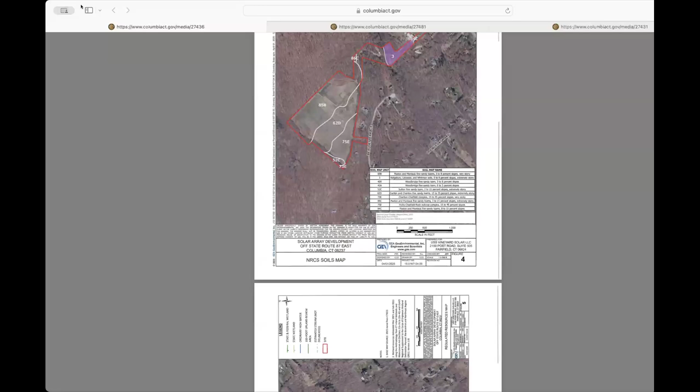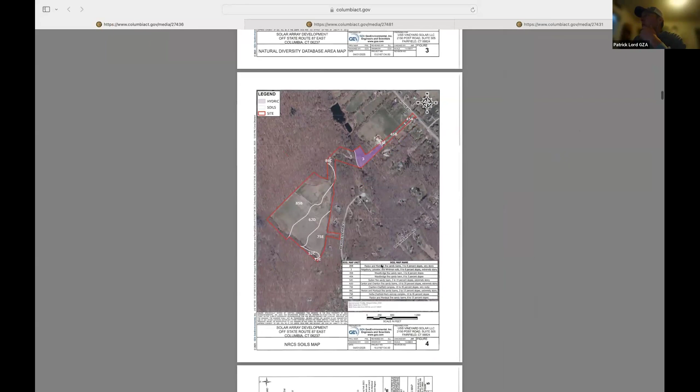Did you want to pull up a site plan, Isabel? Yes, I've got the application here. Excuse me for a moment. I apologize. Let me see. Too many windows open. Let me share my screen here, just to give everyone some context. Okay, so this is the overview of the site. And if there's a specific page, Patrick, that you'd like me to scroll to, let me know. Probably the sheet plan. So it would be sheet C104 of the plans. So that's showing. Would it be easier for me to share my screen? Whichever is easier for you would be completely fine. If you have it in a better format, that would work. Okay. And how do I do that? There should be a button available to you down at the bottom in the middle. It's green. Okay. All right. Let me know if everyone can see that. We can see it. Yep.

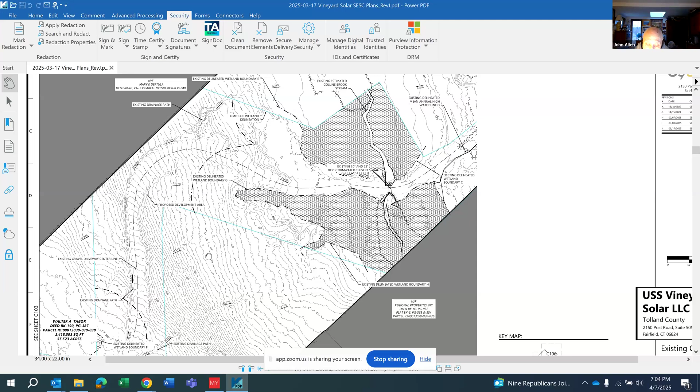Okay. So the proposed work limits are this blue line here. So this is the existing access road leading up to the vineyard. The upland review areas are within this shading. There's obviously a large wetland complex associated with the brook here and on this side of the road. There's no proposed improvements to this larger culvert crossing. They do want to replace this 18-inch CMP that collects water that comes off as sheet flow from the vineyard and the hillside with a 30-inch, just so it can handle larger storms. That's what the engineer came up with.

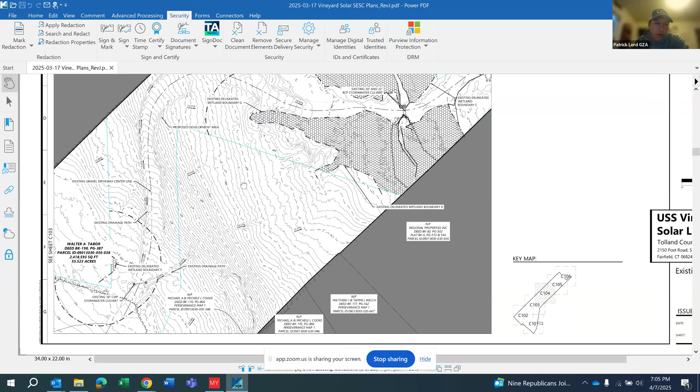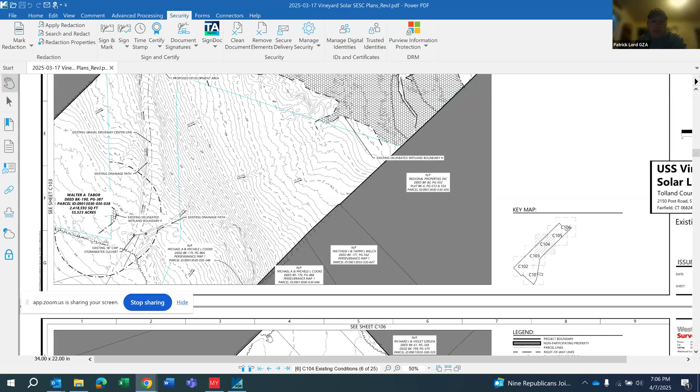So the existing road ends just at the edge of this upland review area here. And what's going to happen is when they build the solar array, they obviously have to get that power to the grid. So to minimize impacts, what they're proposing is to embed an underground wire within the road base itself. So what that's going to do is limit any digging in wetlands or anything else. Before the project, obviously they're going to set up appropriate erosion and sediment controls, which include silt fence and like a biofilter wattle material. I can go to, let's see.

So this will give you an idea. The solar array is going to be here, the upland review area from this wetland in that corner is here. There's another wetland in this corner, so the upland review area is here for that. So the solar array is going to be outside the upland review area itself.

So here you can see this will be new roadway leading up to the solar array with all the electrical components that are needed to transfer the power. So from here to the end of the road, that's where the improvements are going to be. They're also proposing, I can go to a different plan set.

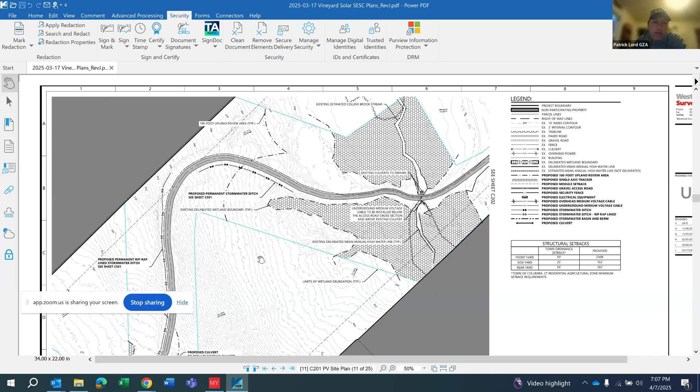There's an existing kind of drainage swale that's on this side of the road, and they're proposing to make some improvements on that with some riprap, and they're proposing a small drainage here. So this portion will catch any water coming on this side of the hillside and direct it towards the wetland area.

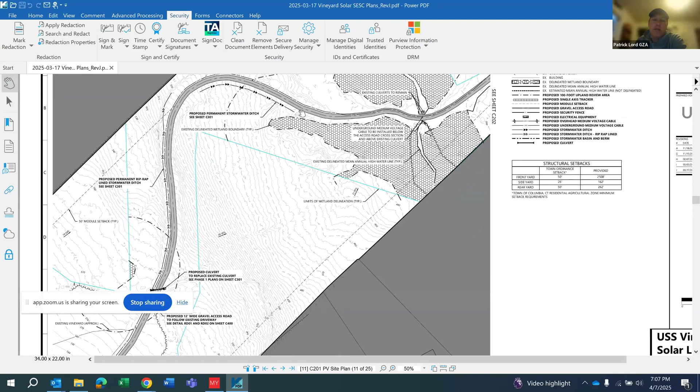Are there any details in the packet about what that drainage ditch is and also the duct bank section through the road? Sure. Yep. That sheet, like in the 400 series. So this gives you an idea, here's the upland review area. So they're going to start creating improvements to the drainage swale here, and all this work will be outside the upland review area until they get to this point here. So a small portion of this inside swale will be within the upland review area.

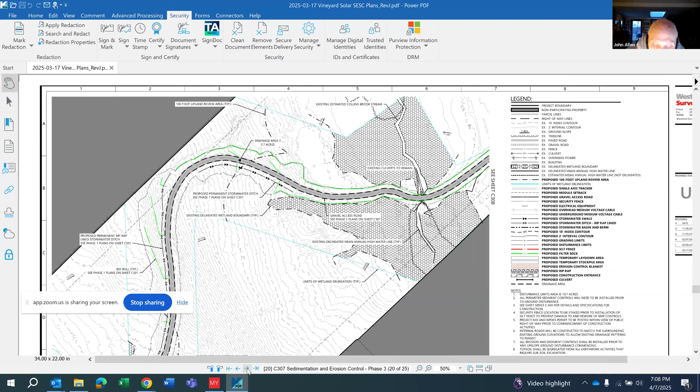So let me get you to the 400 pages. These are the proposed stormwater basins for the field. They did a really good job with providing a lot of detail on this. So I have a question for you. Sure. The solar panels will produce a total of 999 kilowatts, right? According to your memo. Correct. So that's under the threshold for the Connecticut Siting Council.

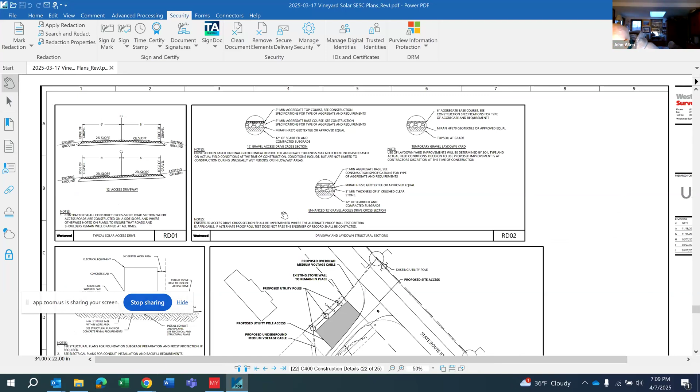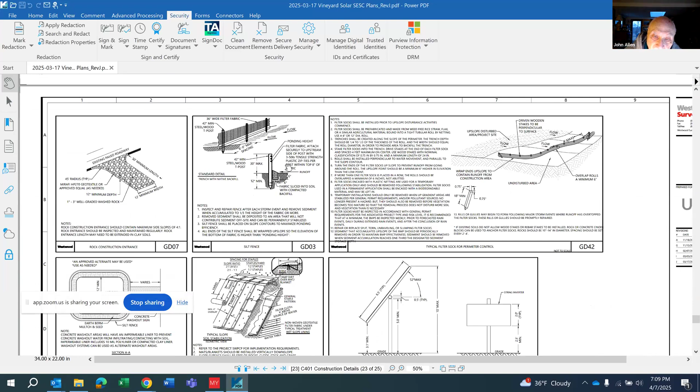Okay. Oversight. An average house, according to what I found out, and maybe I'm wrong, but an average house takes, what is it? Hang on a minute. I got the number here someplace. It uses 877 kilowatt hours per month. So that means that there isn't that much power produced in these things. Or unless my numbers are wrong.

There is a representative here from U.S. Solar. Yeah, I can answer that, Patrick. Thank you. My name is Dan Sapler. I'm a manager at US Solar. So the way to think about the generation is actually in kilowatt hours, not megawatts AC. So this will actually produce about 2.1 million kilowatt hours throughout the year. There is a pretty significant demand from the state also to go renewable, and so this size project actually produces enough energy for us to be willing to develop it. So I hope that answers your question.

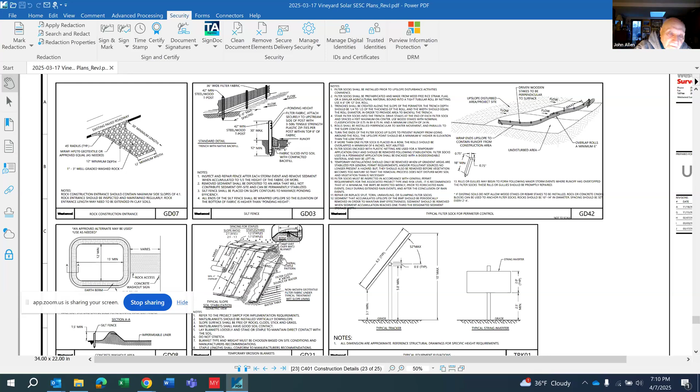According to what you said in the beginning of the program that you gave us, it said that it was 999 kilowatt hours or kilowatts total. And now is that megawatts? It's confusing. Yeah, so it's just below a megawatt of electricity.

But kilowatt hours produced is actually a different method of electric measurement and generation. You can kind of think of it with rough math as essentially just multiplying the AC value, maybe the DC value, by 2,000, and then you'll get your yearly production in kilowatt hours. So that's how utilities use it as well, and produce their measurements. Okay. So it's producing one heck of a lot of power.

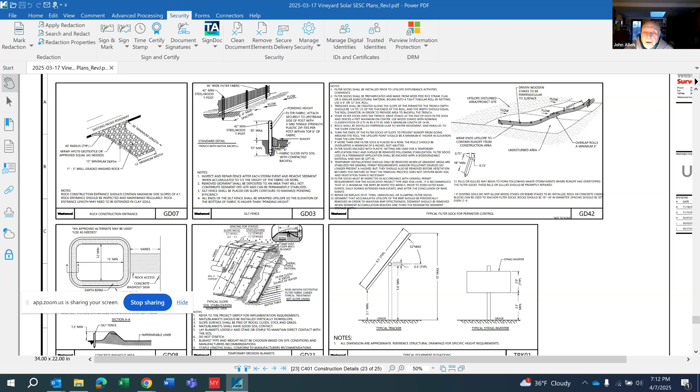And I looked at your picture there. How much area does it take in square feet? It's 7 acres. I don't know what that is in square feet. I could do some quick math though. It's going to be 7 acres? So you have one area that's going to be 2.9 acres here on, I guess that'd be the west, and 4.5, I would say, on the east here. So 7.4?

That begs the question, how much runoff is this going to generate? Exactly. From rainstorms, and water going into the wetlands. Because it's not going to be absorbed by the ground like it normally would.

Hey everyone. This is Eric Elliott with Westwood Professional Services. I'm the lead civil designer for this project, working with US Solar for a long time here, and the GZA team on this project for several years. So generally speaking, I can give a high-level overview of the stormwater practices behind solar projects, and this will be during permanent conditions, during the operations of the project. So for this project in particular, we are on pretty flat slopes where the project is located.

And the panels themselves, as you can see here in the image, don't cover the entirety of the 7 acres. That 7 acres is the fenced area. So the majority of the project will actually be vegetated in a meadow grass condition. So the only added impervious area would be the access road and the equipment pad, which is right at the end of the access road there.

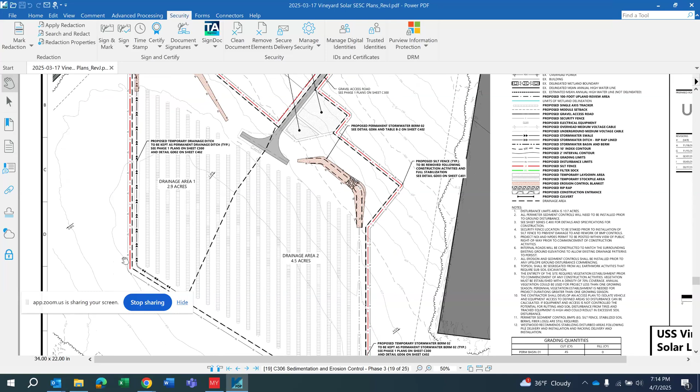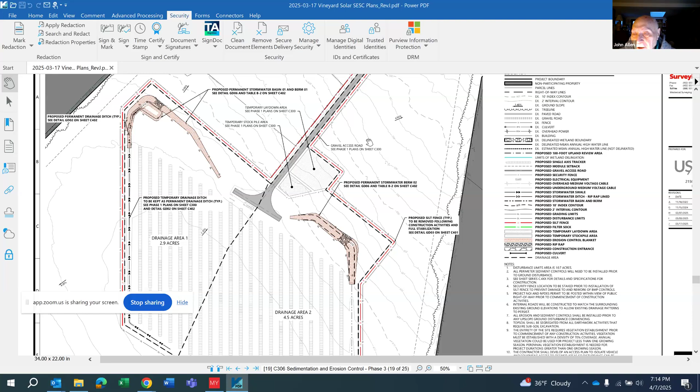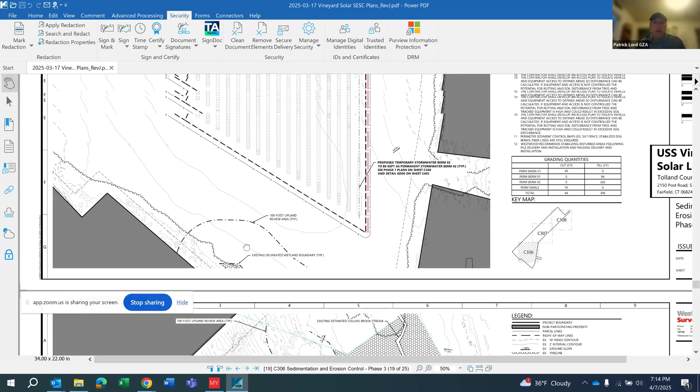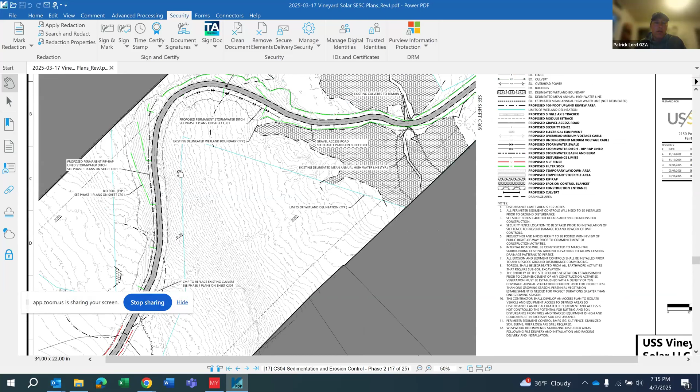Unmute myself. So there's just the edge of a wetland you can see here. So here's the 100-foot upland review area on this end. And if we go, so it's well beyond the 100-foot upland review area there. And let me see, I got another drawing here. Excuse me. Probably the closest wetland to the solar array area there.

Yeah, Patrick, I can confirm that wetland, this way here, the one on the sheet here you're just showing, was 215 feet away from the fence line. This one here. Yep, that's right. It does look pretty close. Here's for scale, here's the 100-foot upland review area. So yeah, okay, given that, probably about, like you said, 200, a little bit more.

So this venture is for a financial program? Because I guess you're selling it back to the electric company, is that correct? It won't be going directly into any homes, or will it? On that property, at least. Yeah, I don't have the answer, Dan. We're participating in Eversource's Shared Clean Energy Facility Program, SCEF. So it'll be fed directly to Eversource, and how they decide to distribute that electricity from there is up to them. There are not any homes or anything on the property that would be designated off takers, but yeah, leave it at that.